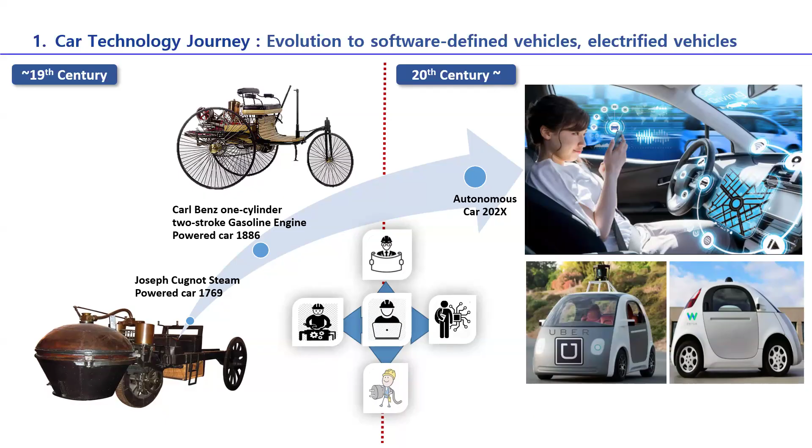So now I'll briefly cover how technology changes. Till the 19th century, we had a powertrain system, which is mainly related to the energy of the vehicle, that is the engine. Earlier there were steam engines and gasoline engines, but now there is a revolution, and all powertrain systems have been electronified.

From the 20th century onwards, there are engine management systems for petrol, gasoline, diesel, and biofuel. After that, there's an era of hybrid engines, then comes the fuel cell, which is mainly used in heavy vehicles, and there are electrical vehicles. So there's a big transition in the powertrain system as well.

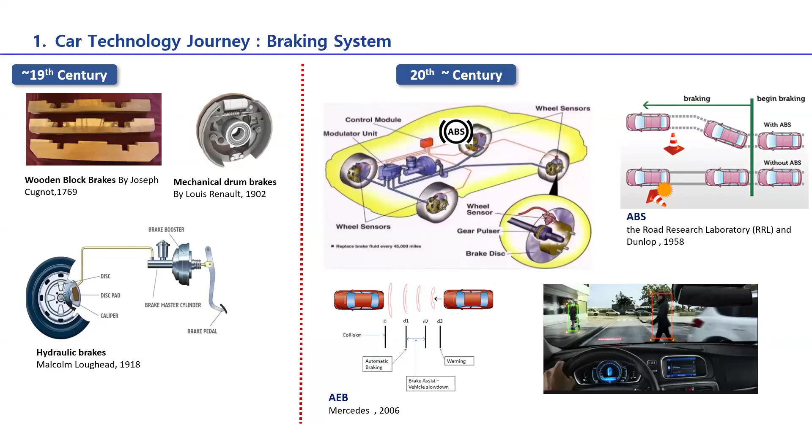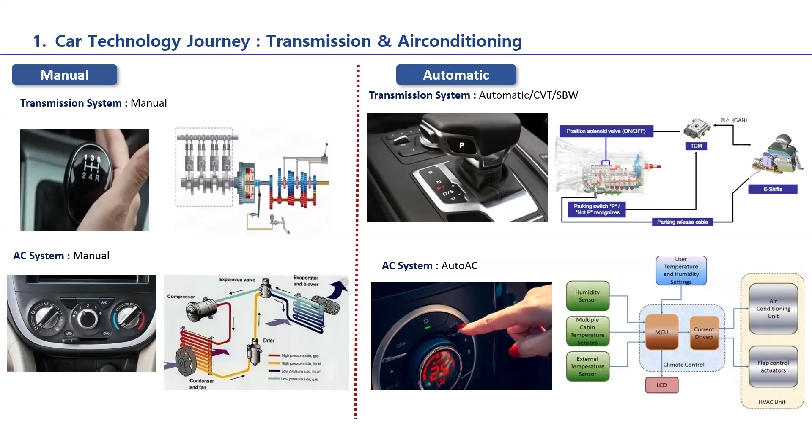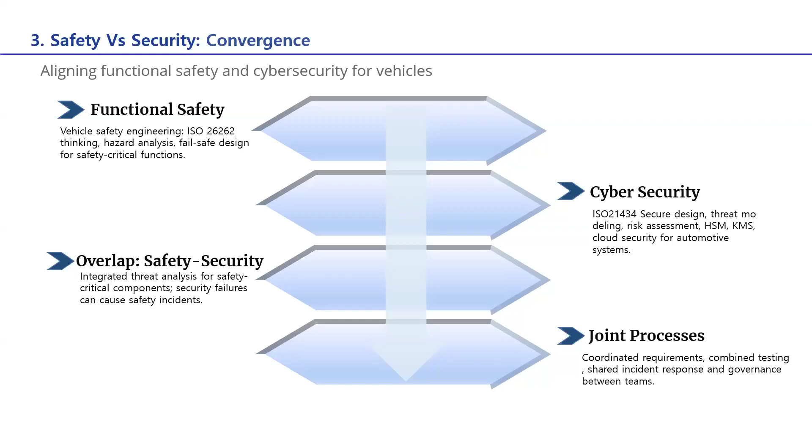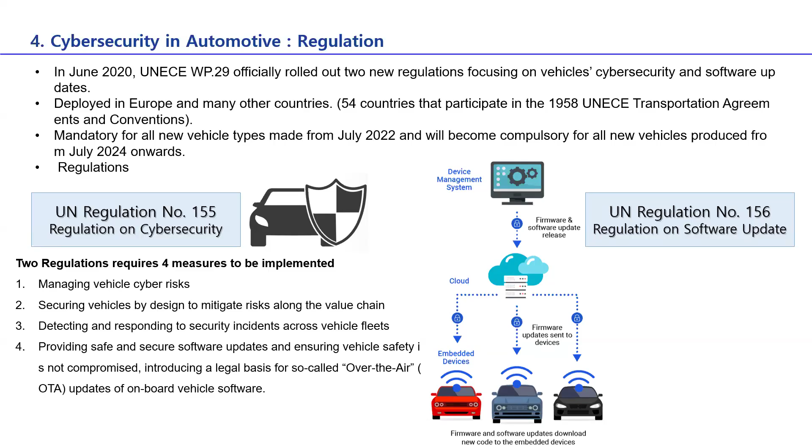Next slide. Okay, so again, this slide covers the regulations and what standards are there.

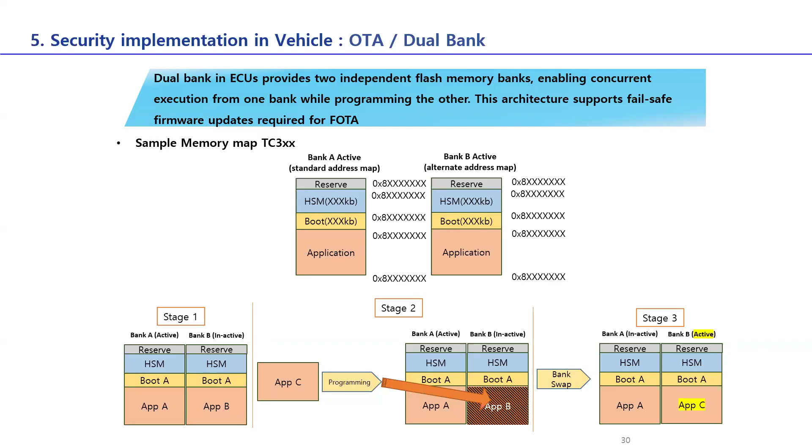So I hope you are able to understand some brief about the security mechanism. These are the kinds of mechanisms being implemented inside the controllers. With this, I think if there is any query, you can let me know.

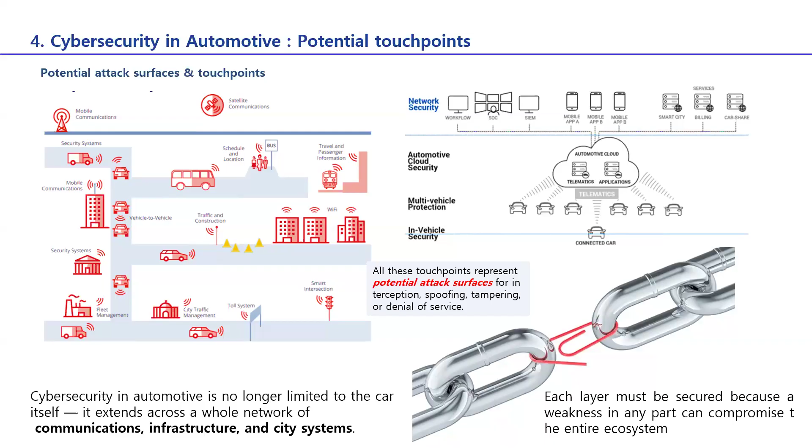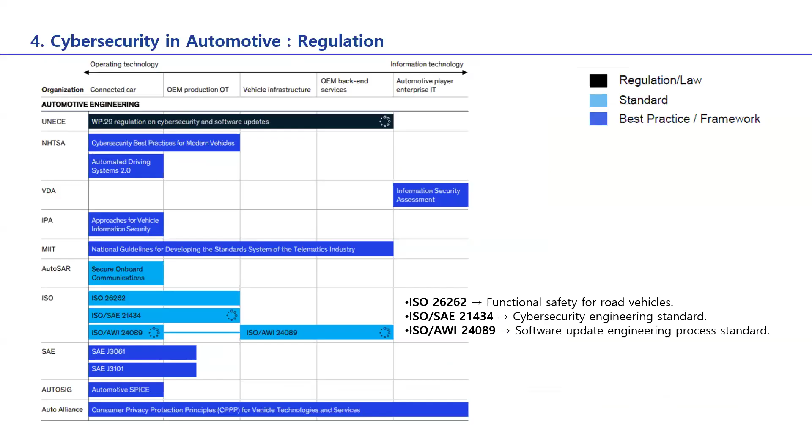Basically, for example if I'm talking about regulation - at the system level, software level, every level, there are different regulations. So like ISO 26262, for example, if I'm saying I'm compliant to ISO 26262, that means I'm complying, then for that ISO 26262 level regulation, I mean approval, I have to take from the authority.

There is a TUV, like one authority, some agency, and there is this ECE R155. There is a third party agency through which the approval has to be taken. For example, at component level also approval has to be taken, then at the vehicle level also. In India, cybersecurity regulation will be introduced in 2028, so in that case there is ARAI, or different agencies which will be capable of giving the certification approval.

Okay, you understand? Okay sir, thank you.

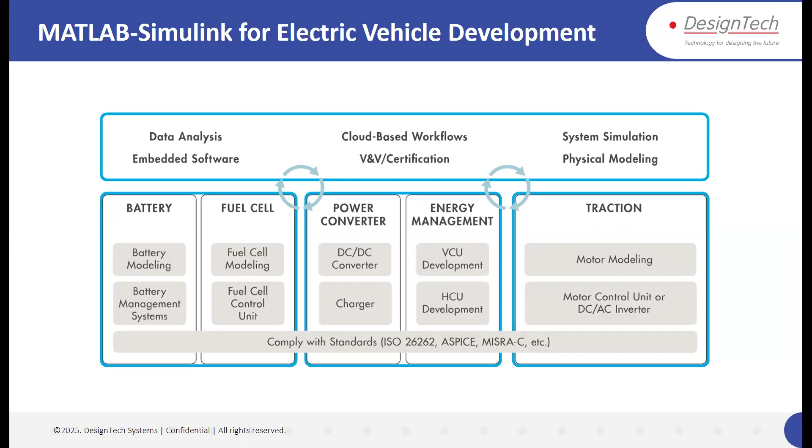Okay, let's move. If we talk about the electric vehicle's major components, let me make one flow chart for you so it will be easy to understand how the current and power is going to supply, and how these components are going to contribute to the heat. First of all, as we know, we get electricity from the grid, generally AC, and it is developed from renewable or non-renewable resources. Then we have AC, and as we know, we have a battery which is going to store the DC supply because we cannot store AC.

So we need one converter, known as the AC to DC converter, also known as rectifier, or with some auxiliary components, it will become your charger. It is going to convert your AC, which may be single phase or three phase, depending upon which kind of charger we have. There are different classifications of chargers, like onboard charger, which is on the vehicle itself.

Okay, there is onboard charger, and there are also other classifications like level 1, level 2, level 3, single phase, three phase. There are so many other classifications of chargers also. So it's going to contribute - if we are going to use level 1 and level 2 charger, it is going to connect with the onboard charger itself.

Level 3 is the only one which is directly going to convert your AC into DC, and then it will directly feed the battery with the help of BMS. But level 1 and level 2 chargers are going to connect with the onboard charger. Generally, an onboard charger will be around 7 kilowatt, so it's going to contribute to the heat while charging the battery as well.

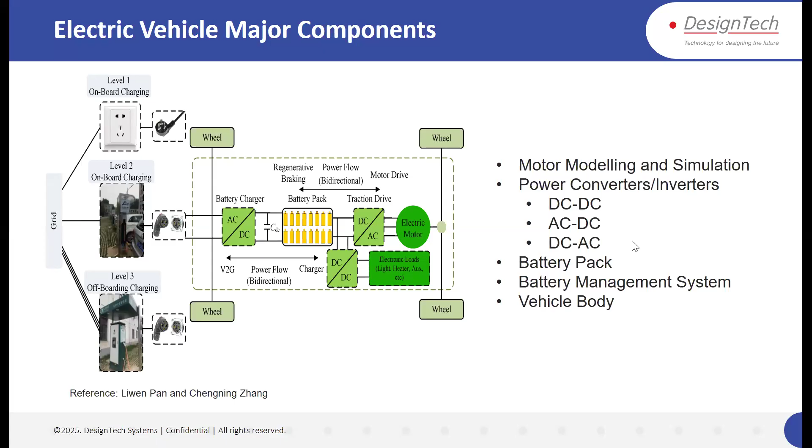So let's move ahead. First of all, we have to understand the working of lithium-ion batteries. The major components are the cathode, anode, electrolyte, and separator. The separator is the most important one in lithium-ion batteries, because it separates the cathode and anode.

If anything happens to this separator, it will contribute to faster movement of ions and electrons through the electrolyte, which will make the cathode and anode short circuit. This will increase the current, which increases the copper losses, or heat losses, and then raise the temperature of the battery, eventually leading to thermal runaway.

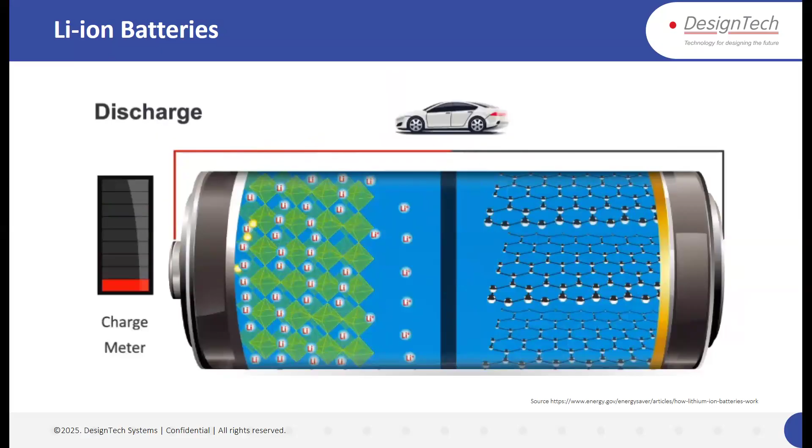The reverse happens during discharging: lithium ions flow from the anode to cathode, and electrons flow through the load. So this is the working. If anything happens to this separator, it is going to damage the battery itself.

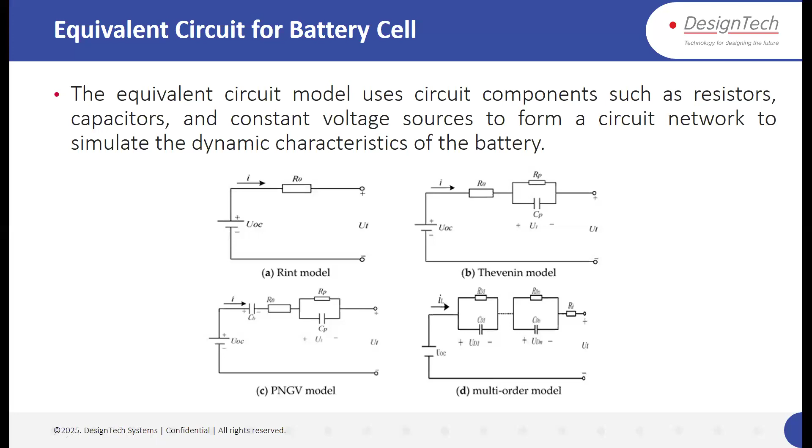Now, the Thevenin model is the most common one, but if you look into others, except the Rint model, which is a very basic model, Thevenin or PNGV or multi-order, these are almost going to be common. Even if we have multi-order, the complexity of this model is going to increase. So generally, industry prefers the Thevenin equivalent model, or in some cases, high order Thevenin model also.

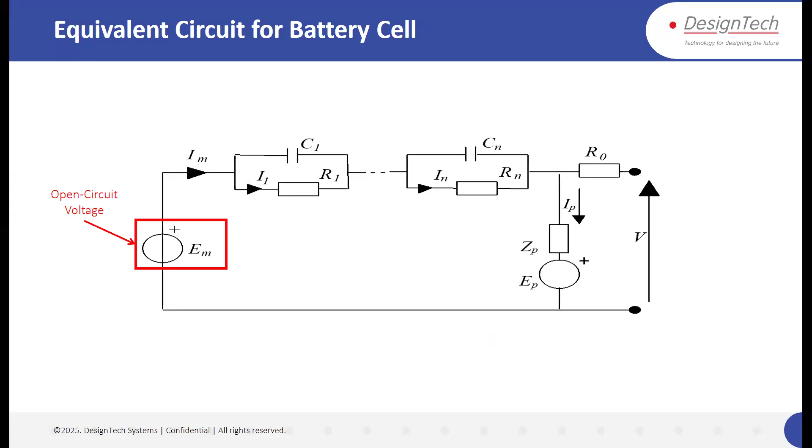So if you see this equivalent circuit for battery cells, most things are common. Here you will find the open circuit voltage, which is going to depend upon SOC and temperature also. And then internal resistance will be over there. Internal resistance or terminal resistance will always be present. If we have not connected any load from the battery, these two are always present.

So terminal resistance will cause the battery to self-discharge after some time. Thereafter, we have this transient behavior or dynamic behavior also. This is known as polarization resistance or polarization capacitance, which is going to be present if we connect the load, and then current is going to be extracted from the battery, then the battery tries to mitigate and fight against that current which is going to be drawn. So that is known as transient dynamics here, and that depends on all these resistances which are going to contribute to the heat, whether it's terminal resistance or polarization resistance R1 or Rn, it is going to contribute to the temperature.

So thereafter, in some cells there are some parasitic losses, but in lithium ion batteries that is not present, or very minimal, so we are not going to take it into account. So if you see all these resistances, polarization or terminal resistance, are somehow a function of SOC, temperature, current and voltage.

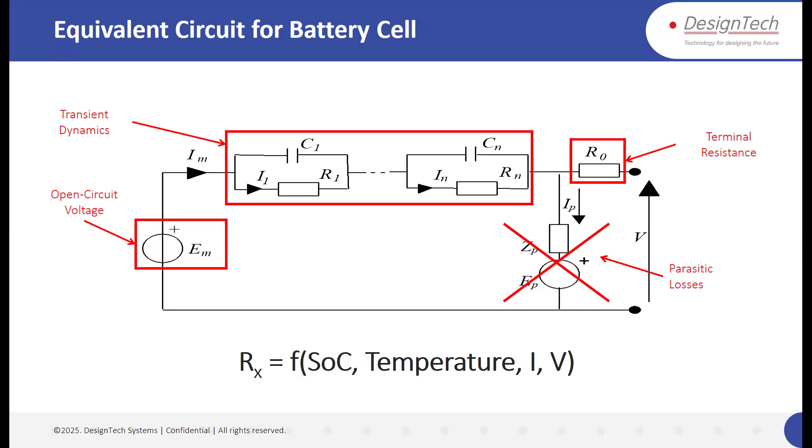You cannot tell, at a definite state of charge, how much voltage will be there. Or you can say, in another way, that by looking at the terminal voltage, you cannot tell how much percentage the battery is charged. We need proper SOC estimation. SOC also depends upon this open circuit voltage, the temperature, and many more things. So for that also we need to do the modeling.

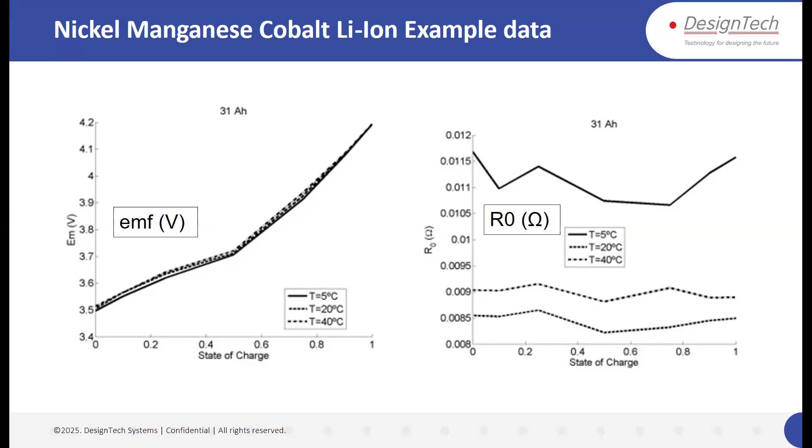If we operate the battery at low temperature, it will also lead to an issue called lithium plating. That will also cause problems, and in the long run it is going to degrade the capacity of the battery, and may also lead to thermal runaway. So both of those are not suitable for the battery. That's why we have to manage the battery in the 15 to 35 degrees Celsius range, which is the desired operating range for any kind of battery.

So here comes the role of SOC estimation. Why do we need to accurately estimate the SOC? Because if we have the accurate SOC, we can set the limits of the BMS. Suppose generally what we do, if we have any battery, we set the lower limit to 15%. You have observed in your mobile also that at 15%, or 20%, it starts asking to put the battery into charging mode.

And at the higher level, we set the limit to 95%. If you observe, if you are charging your mobile battery, after 95% suddenly it will show you 100%, in order to save the battery. So we set this limit, 15% lower limit and 95% upper limit, and it may vary depending upon the manufacturer. So what will happen, if SOC is going to be more than 95%, it will give a signal to the BMS, and the BMS will isolate the charger. If it is 15%, then the BMS will isolate the load in that condition.

So to know the percentage of battery charge, we need SOC properly, and it will give you information about driving range. It depends, it's relative to the battery, and there will be proper communication between the BMS and battery. So there will be an algorithm for calculating the driving range depending upon how much power is going to be consumed. We will see, if we have turned on the AC, then how much power is required to operate the compressor, through the graph.

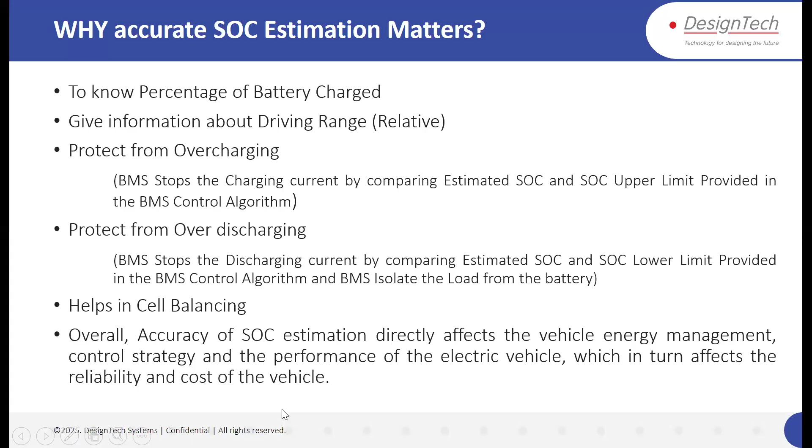Moving ahead, there are different types of estimators. We don't need to worry about the equations behind those estimations. Like Coulomb counting: the final SOC is the initial SOC minus the integration of the current coming in, divided by the total capacity of the battery. We don't need that information once we have these blocks in the Simulink environment.

This comes in the Simscape Battery toolbox. Here we have the basic SOC Coulomb counting method, where we have current and initial SOC only as input, and then we get the final SOC. So the accuracy will be less in this Coulomb counting SOC estimation.

Then we have variable capacity, and SOC estimation using the Kalman filter as well. Here we have the pack current, cell voltage, cell temperature, and initial SOC as inputs. We also have the adaptive Kalman filter.

So as the level of these filters or estimators increases, the accuracy also increases. Now industries are using either Coulomb counting, if it's for a two-wheeler or three-wheeler, or the Kalman filter mostly if it's for a high-speed three-wheeler, two-wheeler, or even four-wheeler. So in the MATLAB Academy, there is a course

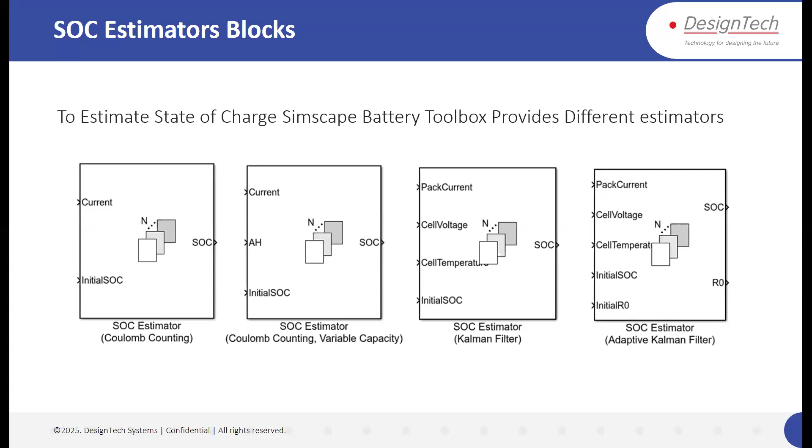named Battery Pack Modeling, and you can go there and learn these things in that course as well. Now moving ahead to battery pack modeling.

First of all, we have already understood the cell. Now there are different types of cells based on form factor: we have pouch cells, prismatic cells, and cylindrical cells, the most common one. These cylindrical cells, or any shape, can be connected in parallel.

Then we get the parallel assembly. And if we connect these parallel assemblies in series, it becomes a module. If we connect multiple modules together, it becomes a module assembly. And if we have different module assemblies combined, it becomes a battery pack.

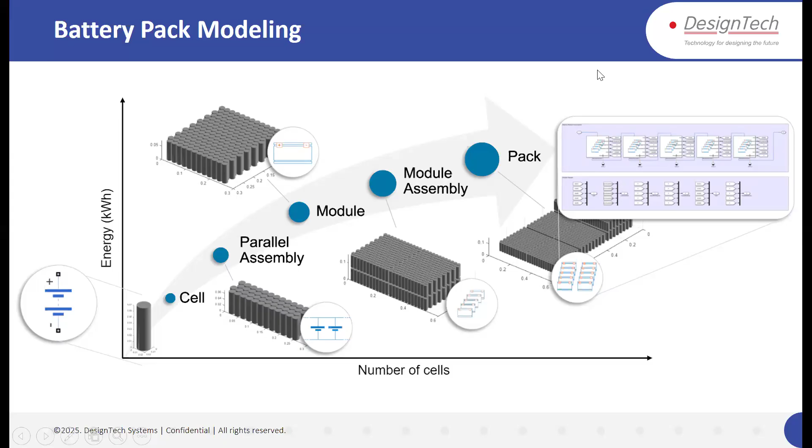You can do all these things either through MATLAB coding, or there is a Battery Builder app. There you can easily integrate the different components - these images are made in the Battery Builder app, so you don't need to worry about building from very basic things. So using Simulink, Simscape, and the Battery Builder app, you can make the battery pack model here. And then we have the battery pack modeling.

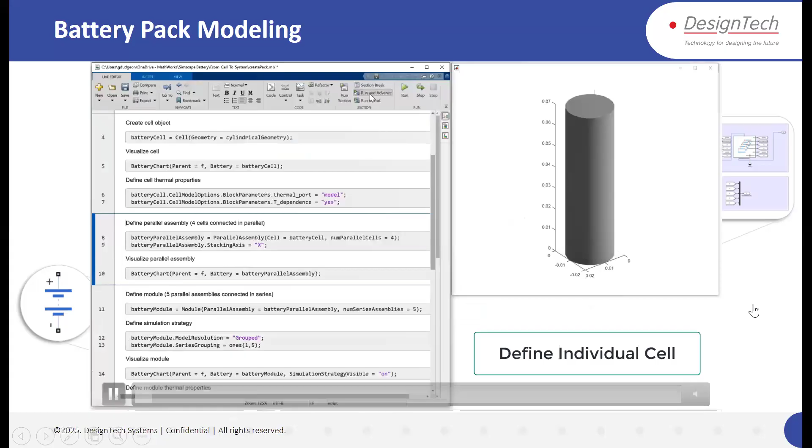Here you can define the individual cell, you can define the parallel assembly. It's being shown through the coding, but without coding also you can do that. Then you can define the module. Here we have taken 4 cells in parallel, so in this way you can do that.

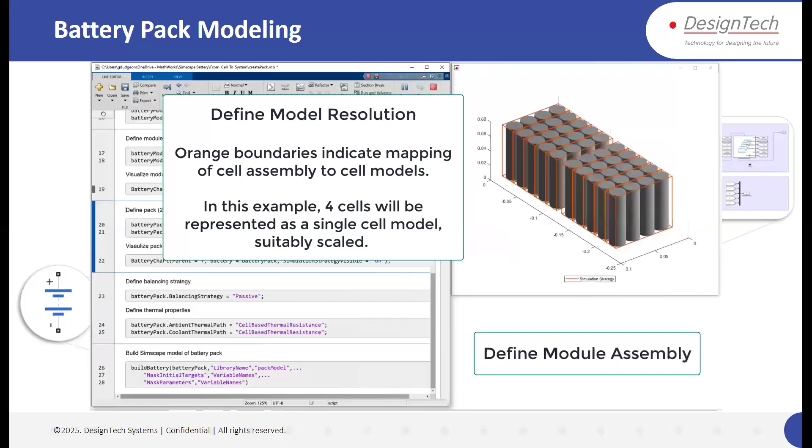Thereafter, we have connected these modules into series. Then it's becoming the module assembly, and then it's becoming the battery pack. So from the cells to module to the battery pack, it is going to be designed. Here you can generate these things, and thereafter you can add the battery pack and electrical

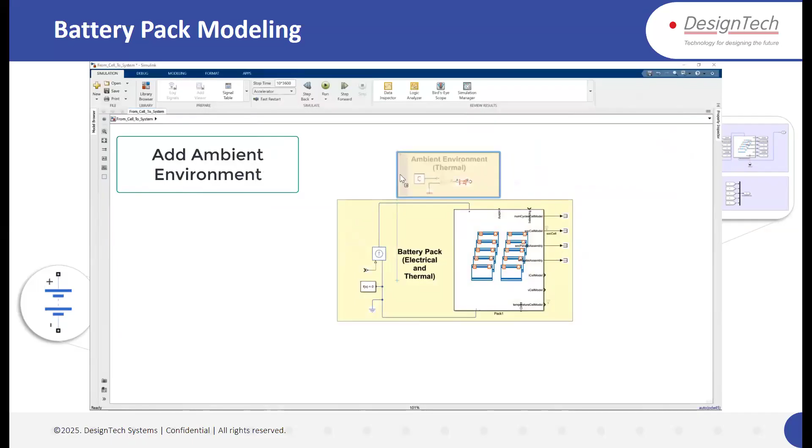load across it, and then you can add the ambient environment into the simulation area, because we cannot test the real battery in different environments, so we can do all these things in the simulation.

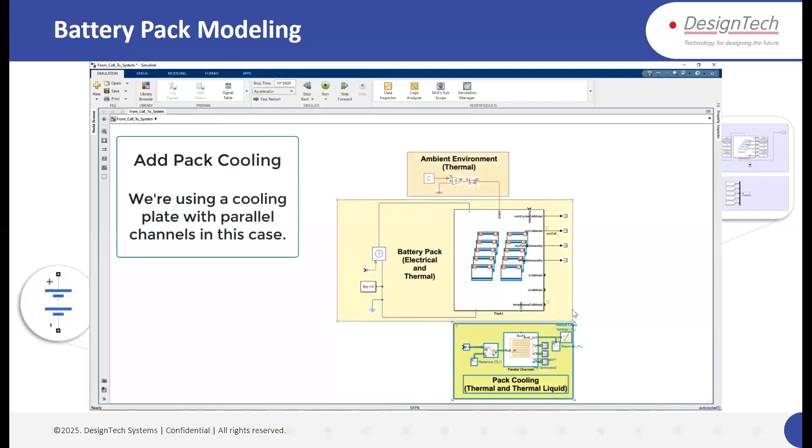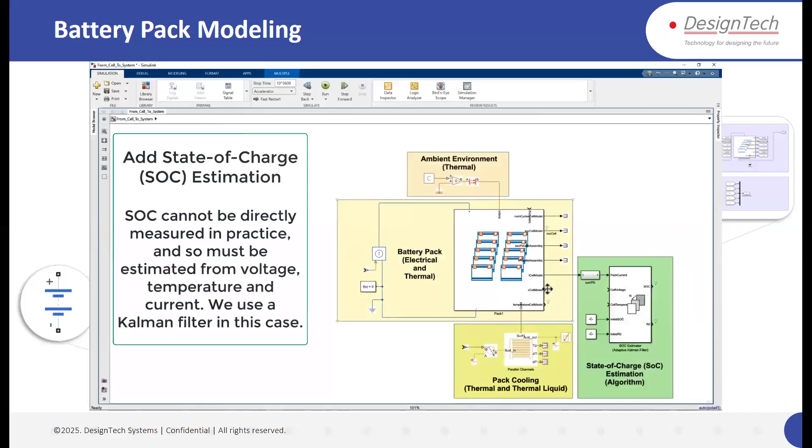Thereafter you can add the battery pack cooling things, liquid cooling or natural cooling, and there are different types of SOC estimation algorithms that you can use. So here adaptive Kalman filter has been used in this demonstration.

Then state of health estimation, that is also important because it's going to impact the overall capacity of the battery. So you can add these SOH estimator also into the battery pack modeling.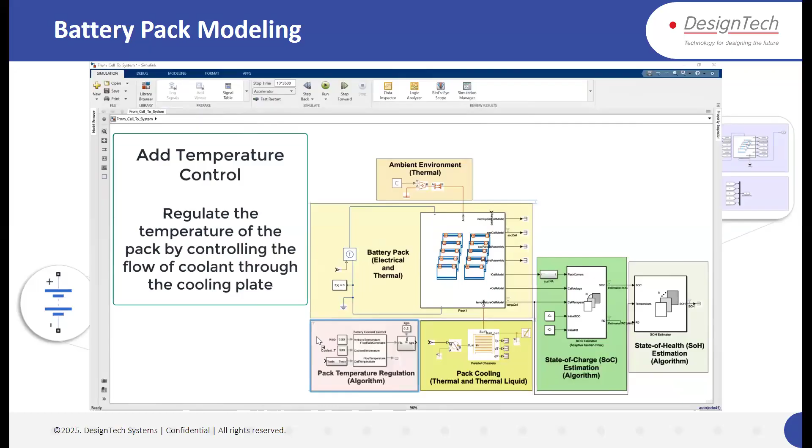You can add the temperature control also in this model. So you can do everything into one environment through physical modeling using the Simscape toolboxes. Here we are using the cell balancing algorithms. These all are important in order to properly simulate the behavior of the battery under different conditions.

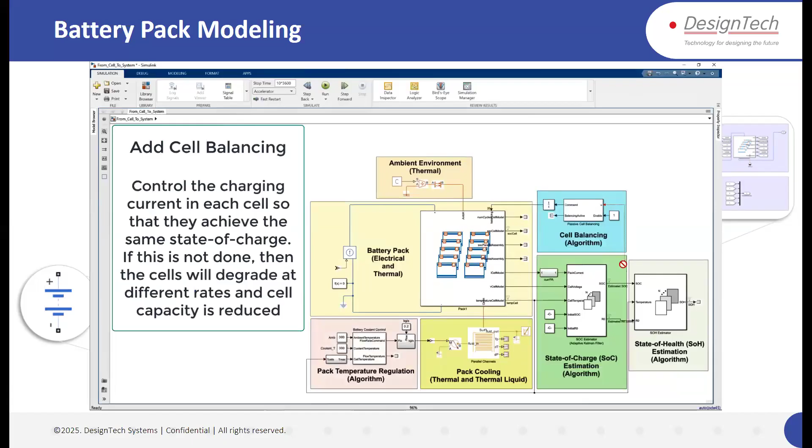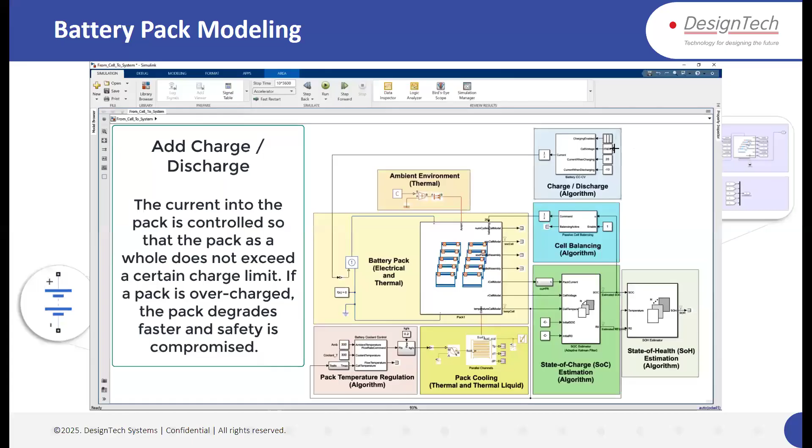Then you can use the charge or discharge algorithm. So we have different charge and discharge algorithms like CCCV and CPCV, and pulse charging is also coming, which is being used. I will show you one example through the CCCV as well coming up.

Industries are using these things for rapid prototyping. So these things can be created. From the cell to system, you can create all these into the Simscape battery environment.

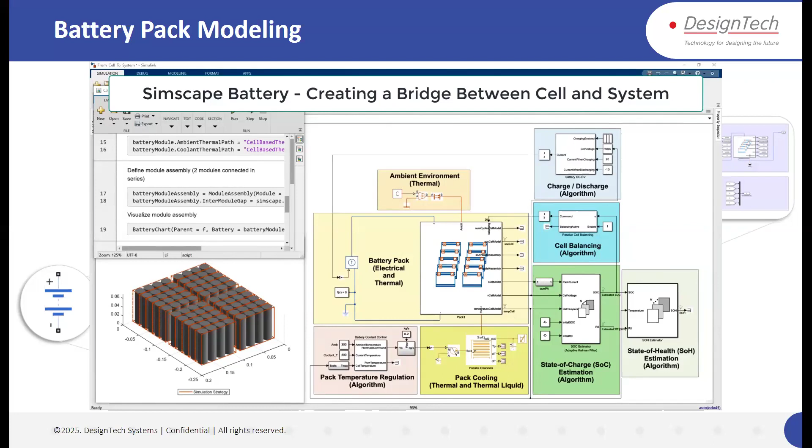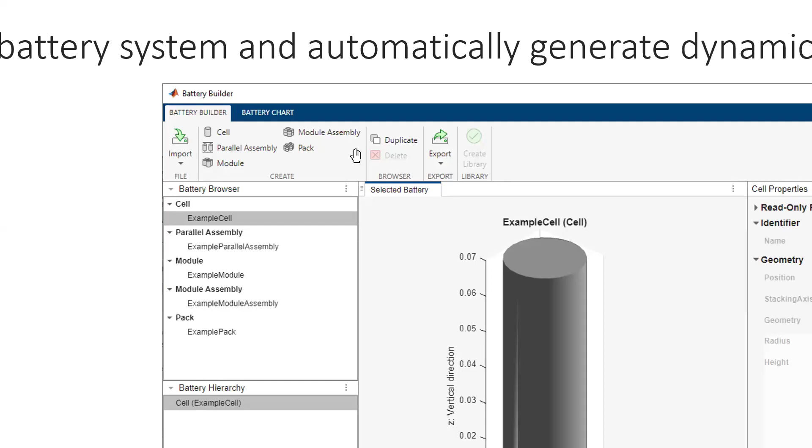Thereafter, you can also define the battery system and automatically generate dynamic models. This is your battery builder app, where you can see, if you observe here, this is the battery builder app. You can either import any model or example, or you can define your cell here.

So cell geometry can be decided here, whether you want it as cylindrical, prismatic, or pouch. That can be decided over here, and then radius, height, everything matters here, because there are three types of heat transfer: radiation, conduction, and convection. So these height, weight, and radius, all things matter in that.

So you can define each and everything, and thereafter you can define the cell parameters and many more things, so that from the cell to module assembly, and then you can design the battery pack, everything here with very interactive, low coding or no coding in MATLAB's Simscape toolbox.

And under the Simscape battery we have this battery builder app. So if you would like to know how to design the battery pack, there is one battery pack modeling course on MATLAB Academy. You can go, and this is free of cost. I think you can go and learn this on-ramp course through MATLAB Academy. I'll provide this sheet to all of you, so you can go through these slides and this link as well.

Then BMS. BMS is like a brain of the battery. I have a question for you all: kindly note it down, why do we need BMS with lithium-ion battery, not with other kinds of battery like lead acid? So this is my question.

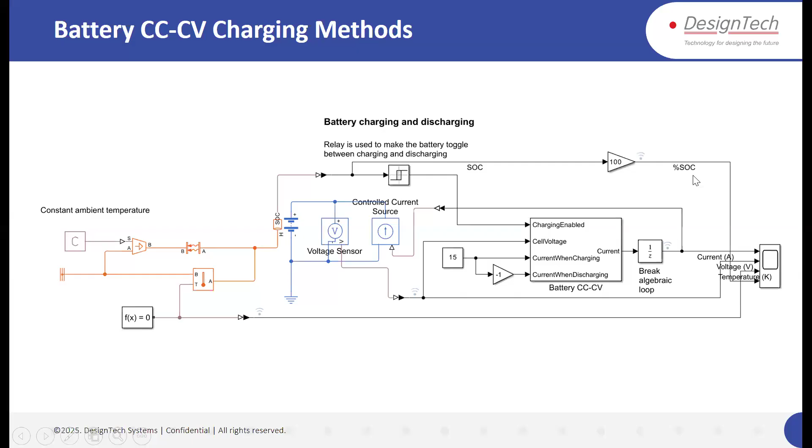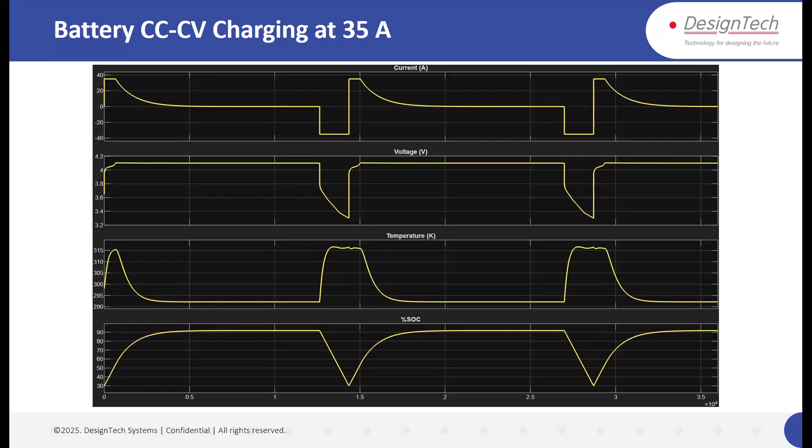If anything happens because of mechanical abuse, electrical abuse, or thermal abuse, these batteries can go under thermal runaway. So what will happen in mechanical abuse? If penetration or crush happens on the battery, it will deform the separator. As I've told you, the separator is the main organ, you can say, of the battery. If anything happens to the separator, it will create an internal short circuit.

So if mechanical abuse happens, it will create internal short circuit here, and then it leads to electrical abuse. Internal short circuit means cathode and anode will behave like a short circuit, and electrons will move very fast from cathode to anode and vice versa through the electrolyte, not through the external circuit. This will be very fast, and anode and cathode both will not be able to handle that much current. Because of that it will create heat - I square R - and hence it leads to thermal abuse.

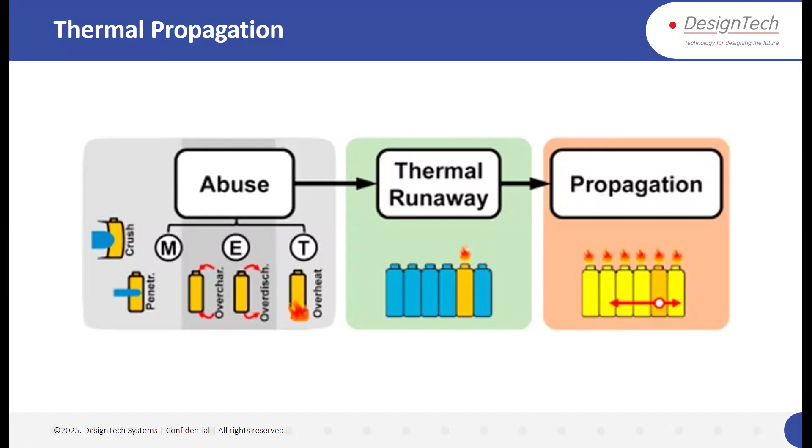So for that purpose, we have the refrigeration cycle. There are 4 processes in this refrigeration cycle. The first one is known as compression. This is the first step, and it is going to increase the pressure and temperature of the working gas.

The next step is condensation, through the condenser. So cycle point 2 will go here, and condensation is one of the key heat exchange steps. The hot gases of the refrigerant fluid condense into a liquid form, which causes the latent heat of vaporization to flow into the environment.

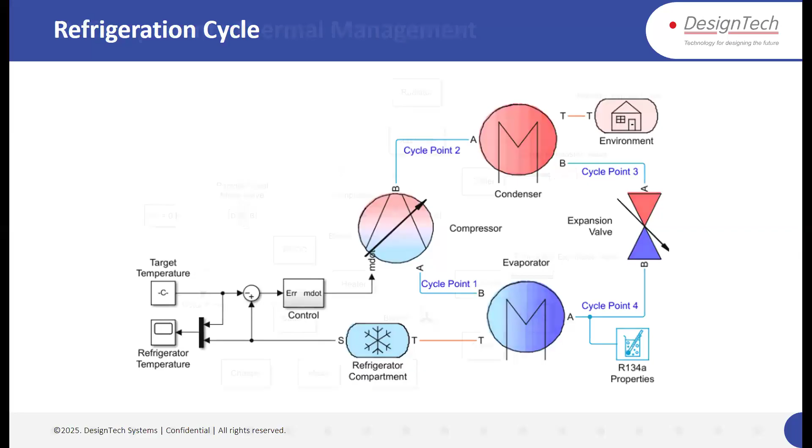Thereafter, this expansion valve is there, and it will expand, and then it will pass through the evaporator, which will cool down that liquid. This process will happen. So overall this is going to happen, and how we are going to model this into MATLAB is shown over there.

Now the heat from all these components is collected and expelled to the environment using the radiator. If radiator is not enough, then we have the chiller, and then it will do the other part.

The second subsystem is in the car cabin. We always need, sometimes, cooling into the cabin, and sometimes we need to heat up the cabin. So for that we have this PTC heater, and we have evaporator which works like an AC.

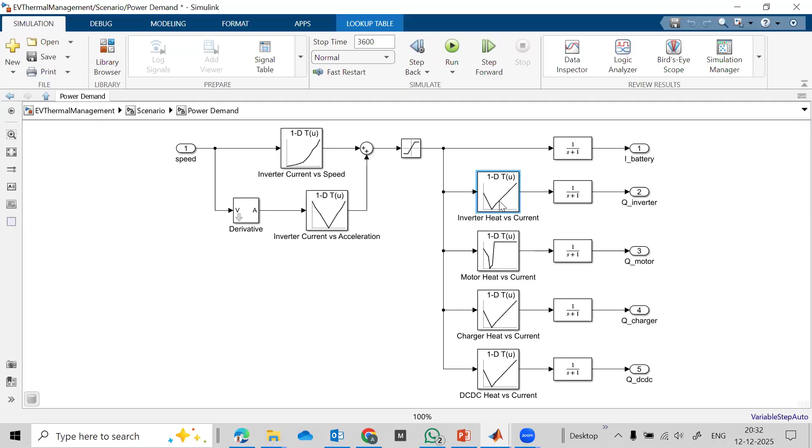This relation is represented between the heat and the current which flows through the inverter, and how much heat has been caused because of that. So inverter heat, motor heat, charger heat versus current, and DCDC heat versus current has been given. This is some data which we have given. Don't worry, I'll share this model to all of you so you can explore about it.

Thereafter, we have the control subsystem over there, which controls all the controllers for the pumps, for the compressor, for the fan, blower. So for everything, it does this. This involves in the thermal management. Cabin air control, fan control, coolant loop control, and compressor control has been done through there.

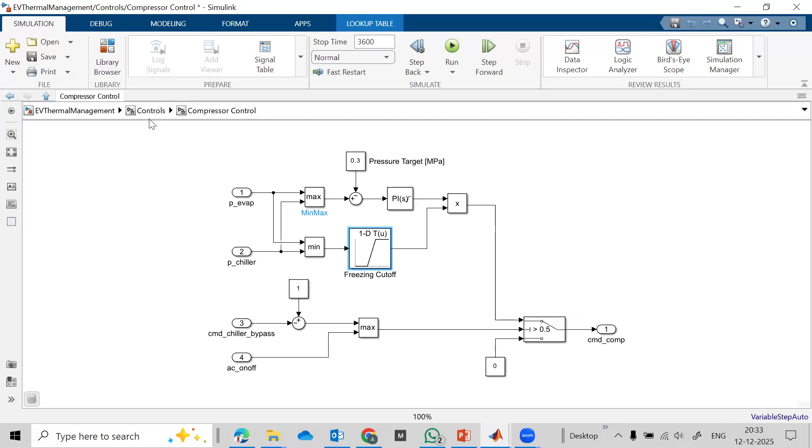And there is another subsystem inside every control, so you can explore these things. So freezing cutoff has been done, minima and maxima has been set. What minimum temperature we need, what maximum temperature we need, everything can be commanded over there.

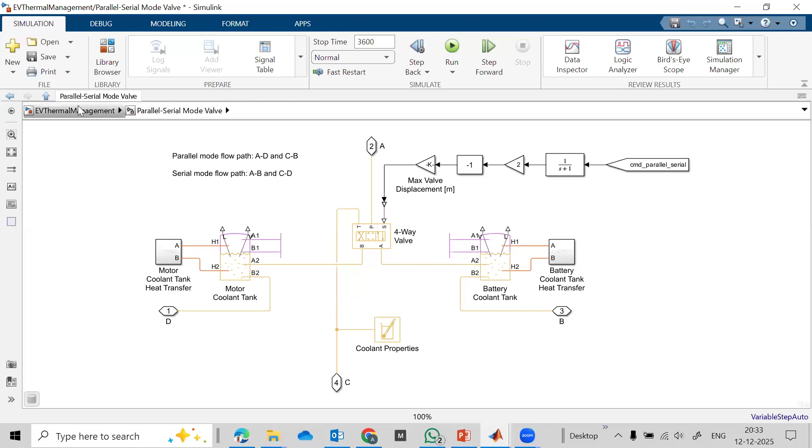As I have told you, serial and parallel mode. Here, if parallel mode is happening, it's A to D and C to B. So A and D connect together, and C and B connect together, then it will be like a parallel mode, which is used in the cooling environment. And if the battery needs to cool down, we need parallel mode. If the battery needs heat, then we use the serial mode, in which A and B will be connected with each other, and C and D will be connected with each other. So this is a valve, a four-way valve.

Thereafter, motor pump subsystem is here. The motor pump maximum speed is written in RPM, that is 1000 RPM, which is going to run the motor pump, and then fluid moves across it.

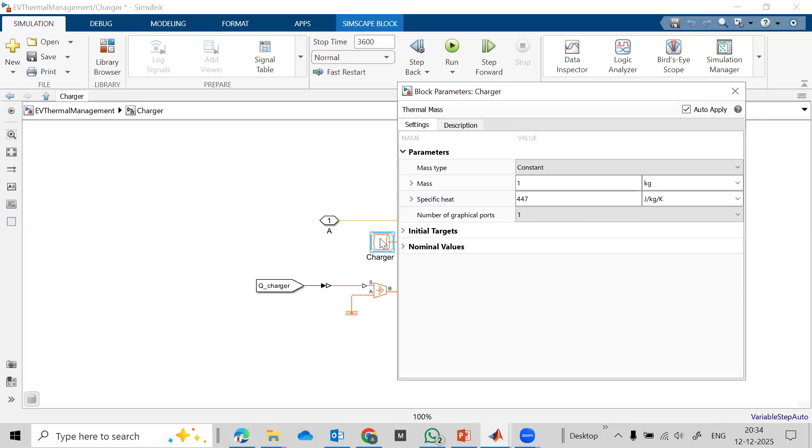Then we have the charger subsystem over here. The same thing, we have the coolant jacket, and rather than using a detailed charger model, we have given thermal mass of the charger, which is 1 kg, and specific heat is 447 joule per kg per Kelvin. If you have any model of the charger having thermal behavior also, you can replace this model with that one, and then you can also test. In that condition, you can find out the dynamic behavior of the things also.

Thereafter, we have the motor subsystem as well. Here also we have the coolant. Similar kind of modeling has been done in all this - inverter, motor, and charger also. So similar things has been used.

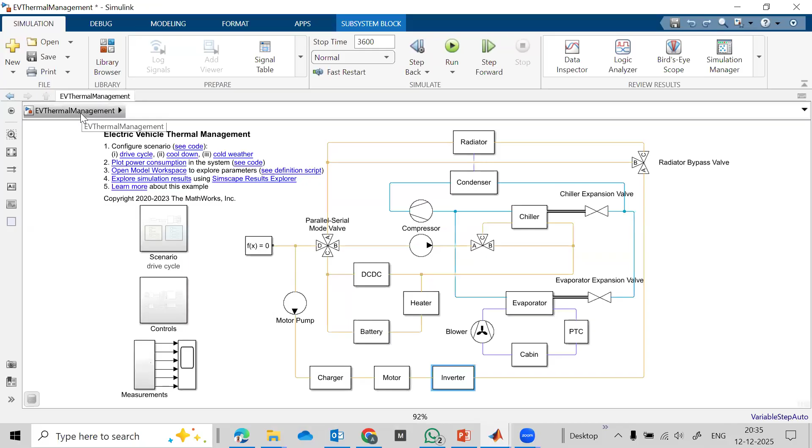Then we have this radiator subsystem. In the radiator, we have different types of environmental air, so it is going to switch in between that as well.

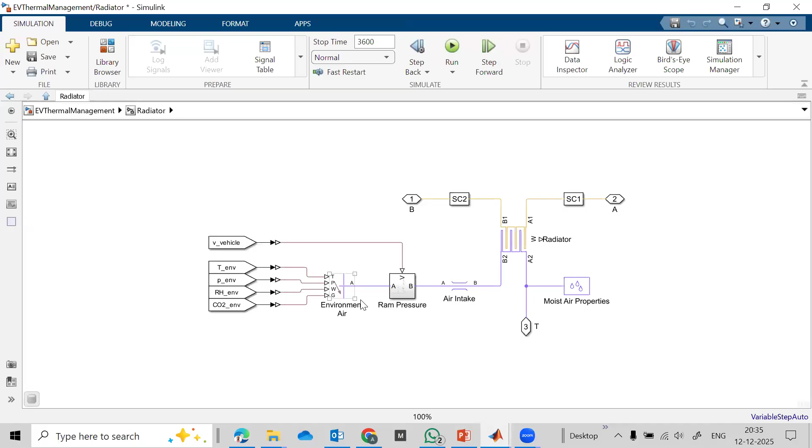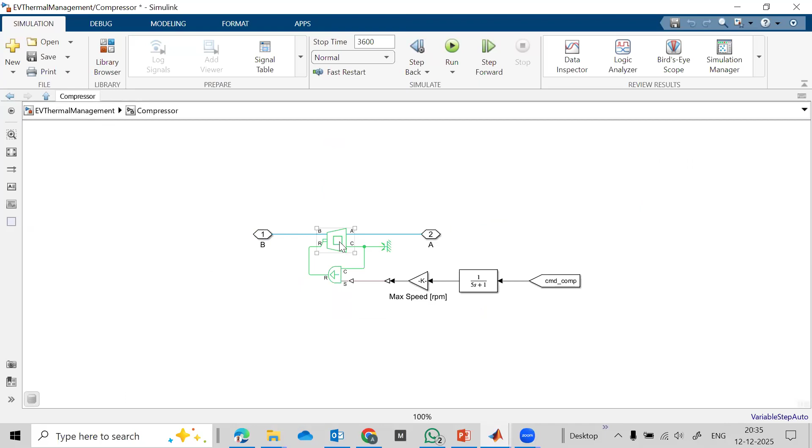Thereafter, we have the compressor. This is a positive displacement compressor we have used, and then we are going to give the command to the compressor to operate.

Likewise, we have different other subsystems, so it is going to be quite similar to each other. I will share all these examples with all of you, and then you can explore. Let me share the CC other methods also.

So this is the CCCV method. If you observe, I would like to tell you 15 ampere. So what is going to happen at 15 ampere? Let me run that model.

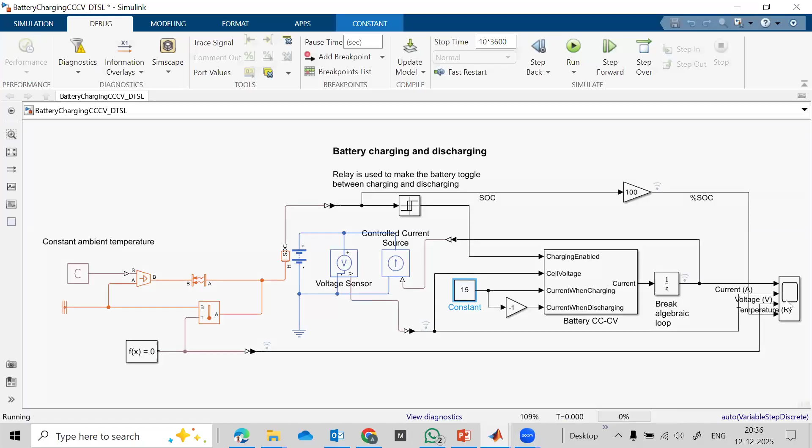If you observe here in the scope, let me go to data cursor. So this is the constant current phase. I'm going to bring this constant current phase when it is 15 ampere. So in this phase it is 15 ampere, and we are looking at the change in current from 0 to 15. Let me make the changes here.

So this is 2939 seconds. For this much time, it is going to be fast charging, and in another phase it is going to be slow charging. If you see the temperature rise, our focus is temperature right now, so the change in temperature is going to be 1.3869. That has changed. If you look into the SOC, it changes to 45.35. So in this way, you can explore more about any kind of system you are making.

Thereafter, if I'm going to move this to the CV phase, so it is going to be like this. This phase, this time, is going to be less, and you can see almost no change in the value.

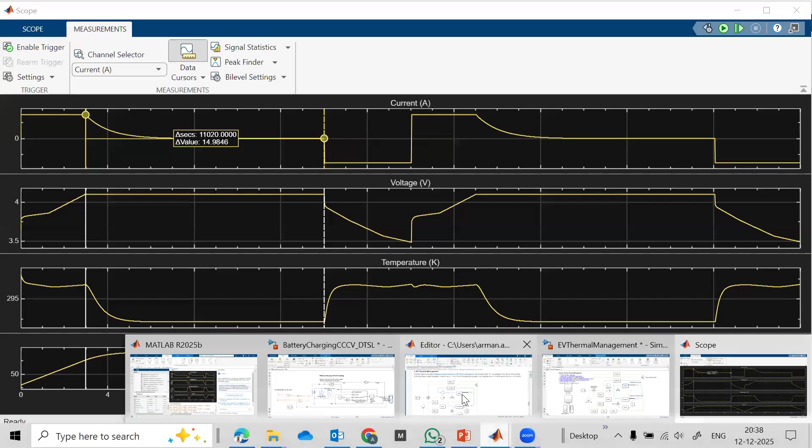If I'm going to change this amount of current - since it is a 27 Ah battery, I'm going to use 27 ampere over there. I'm going to run it for 10 hours. So this will get decreased as well here.

So you can see this constant current timing has decreased - almost 1200 seconds now. Earlier it was almost 2400 seconds where the fast charging was happening.

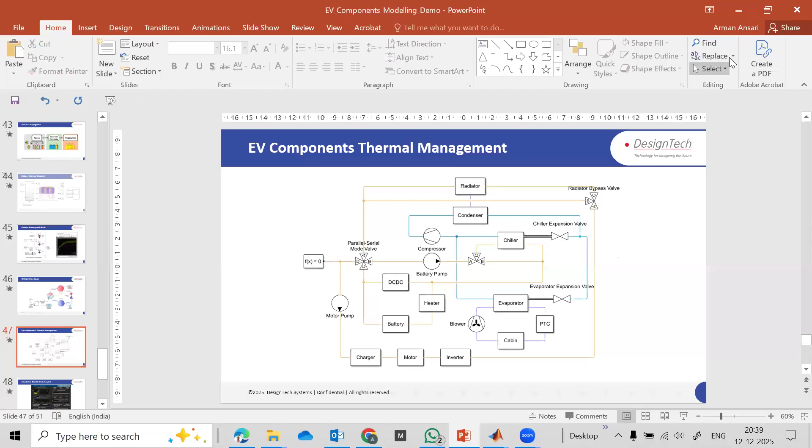Now let's move to the slide once again. I have to explain some more things about the EV component thermal management. So if we are going to run that into the different environment.

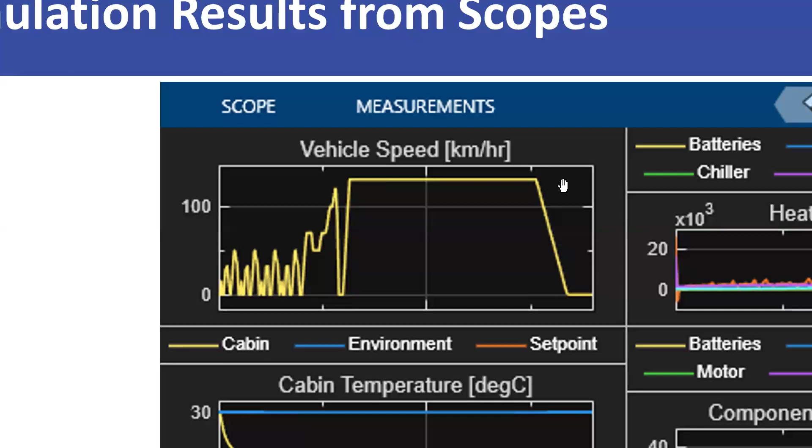Here you can observe this is in the drive condition, drive cycle condition. The vehicle speed was constant in this phase, and this is the NEDC drive cycle. So cabin temperature is going to rise - cabin temperature is 30 degrees Celsius initially, which comes down around 21 degrees Celsius, sometimes going up and down. We have set the limit at 21, which I showed you. But the environmental condition is 30 degrees Celsius and the set point is 21 for the cabin.

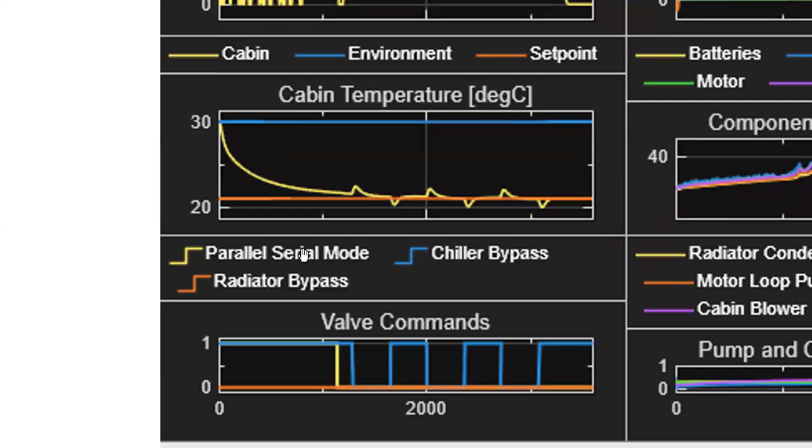Thereafter we have the parallel serial mode, chiller bypass mode, and radiator bypass is going to happen in this phase.

Then if you observe this - because I didn't run that model, as it will take time, I have just taken the screenshot after running it and I'm showing it to you so that it will not take more of your time. So if you observe the heat flow rates here, just a minute, in the battery...

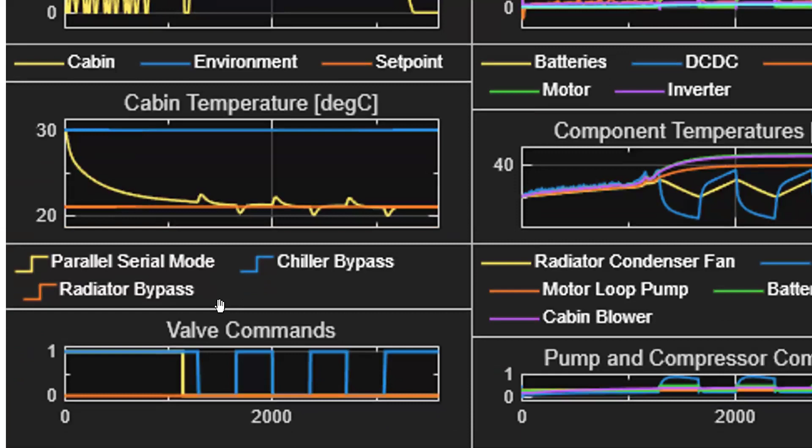You can see the condenser is going to take more heat flow rate, so more heat will flow through the condenser. The scope shows the vehicle speed, heat dissipation, cabin temperature, component temperature, and everything. The coolant tube is in serial condition, serial mode - at that time it is going to have the chiller bypass.

Thereafter, this pump and compressor component temperature has been shown. There is the radiator condenser fan when it is getting on, when the compressor is getting on, pump is getting on. That has been shown over there. This was for 3600 seconds.

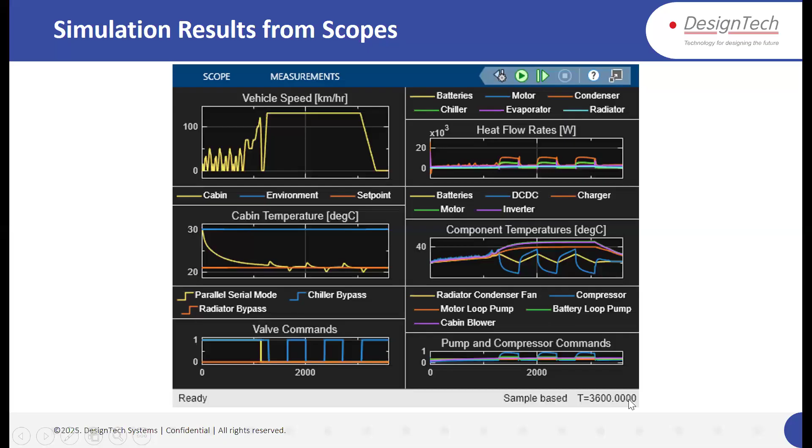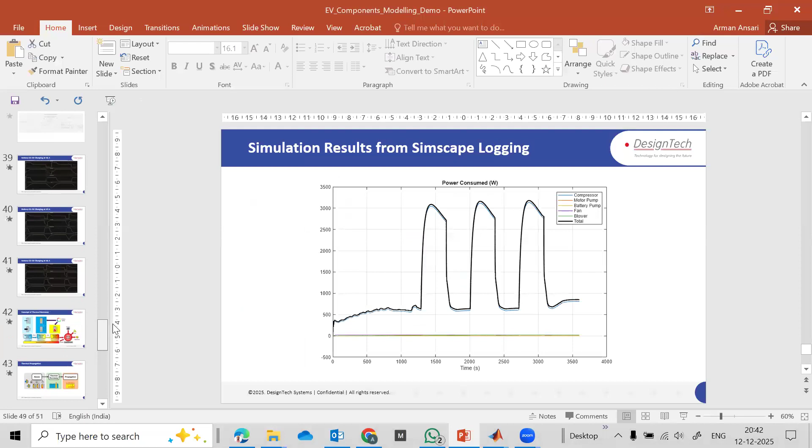I would like to show you one video demo also that we use in the industry to make the battery pack. Let me share that screen and play this video.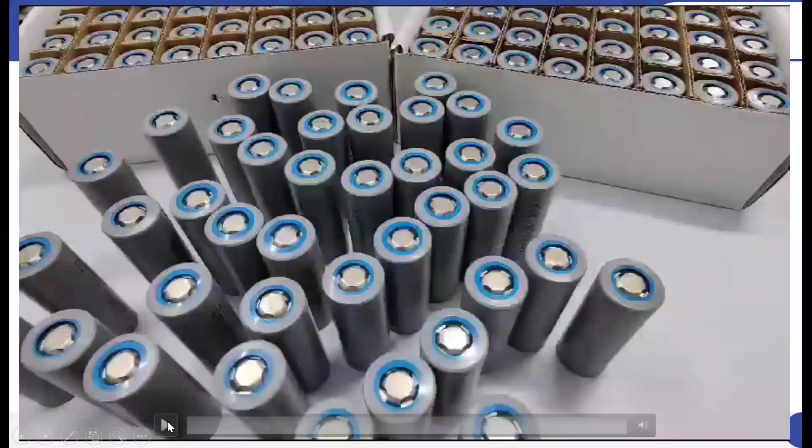So here you can see we have different types of lithium-ion cell batteries, and here you can see the cell data.

So here it is going to be 3.7 volt, and our maximum 4.2 volt is going to be passed through that. Later we will arrange them into series and parallel.

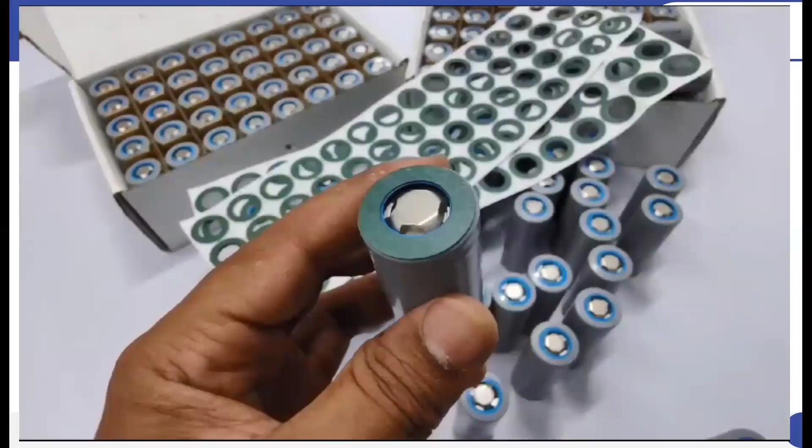So it will be connected in this way, and then the battery pack will be designed. We will arrange them into this way. We are going to create two modules in this video, so for two modules we need four types of such layers, one for upper and one for lower.

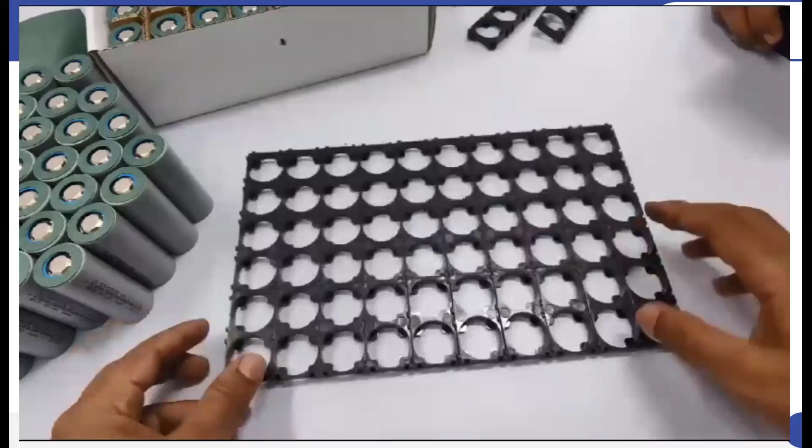Here we are going to arrange the cells into series and parallel. The flat portion of the cell is the negative terminal, and the cut one is the positive terminal. So that we are arranging into the series, because in series we have to connect the batteries into a plus and minus way. So this layer is going to be in series with each other.

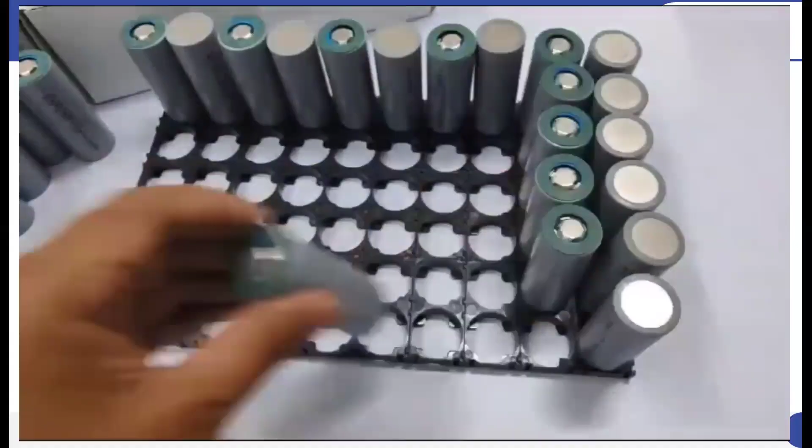Similarly, we have to do the other parts, and the similar anode or cathode is going to be arranged. So this row or column is going to be in parallel, because a similar kind of plate, anode or cathode plate, is there that we have arranged.

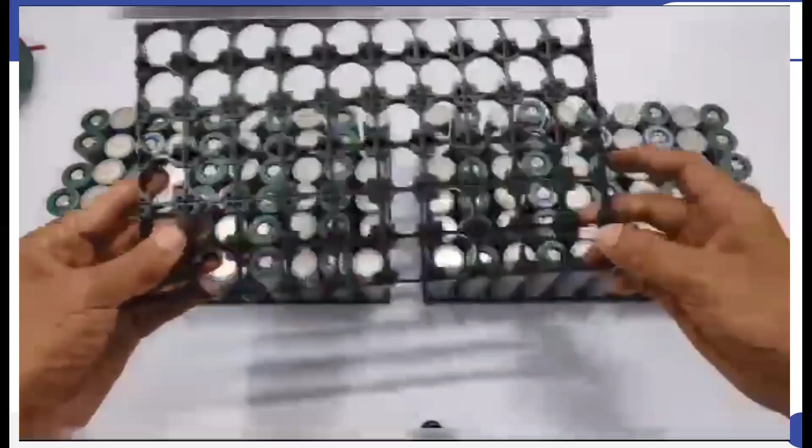In a similar way, we have created another module, and then we are going to put another cell spacer in between them. Now you can see this is cylindrical, so they have proper spacing in between them. That's why most of the industries are using this one, except Tesla, which has a dedicated battery thermal management system for their battery. They are using prismatic cells also, and this is known as the sheet, metal sheet, made of nickel.

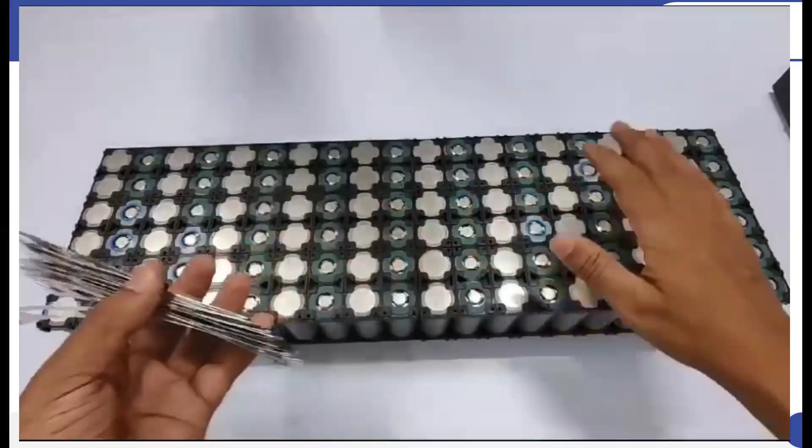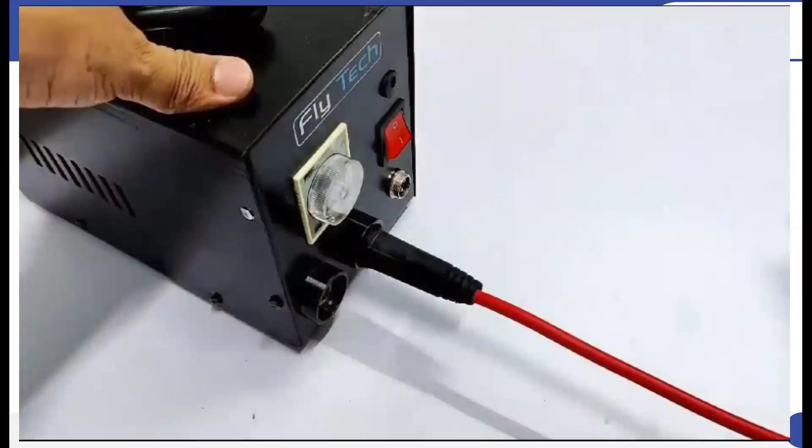This one is your spot welder machine, and then this is the foot control machine. We are going to apply foot pressure over that in order to operate the spot welding. Here you can see we are going to use this strip, and we are applying the pressure over that for the spot welding.

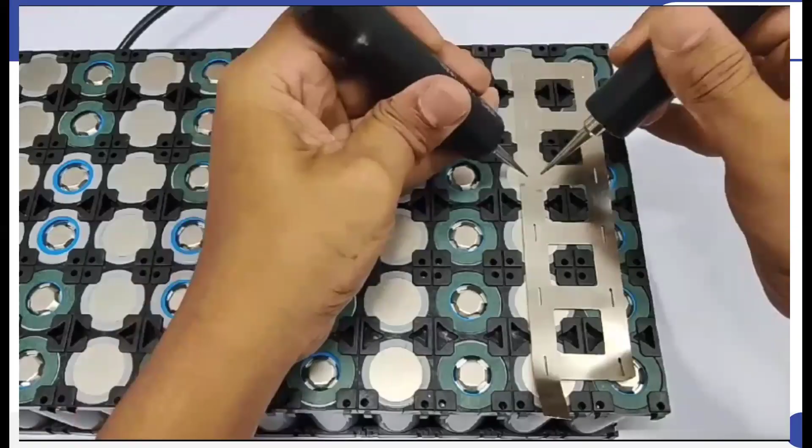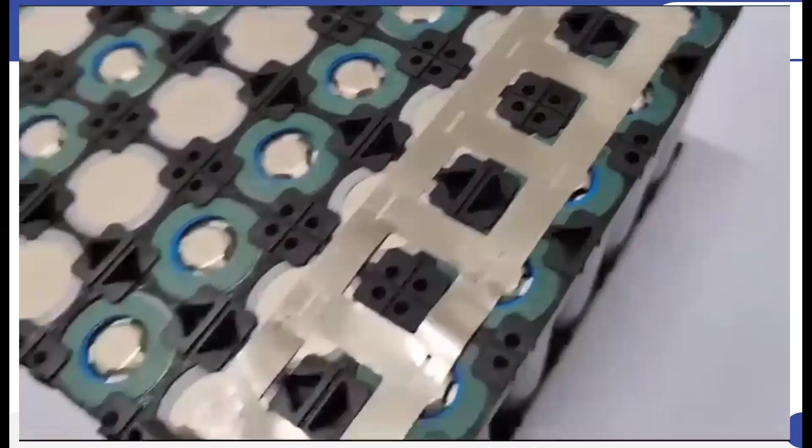Generally nickel is used, so this might be nickel. If there is no proper spot welding, then we have to remove it, so we have to increase the dimension of the spot as well. It should not be very large, otherwise it will hamper the other side of the battery. We have to take care of that at the time of designing the battery pack.

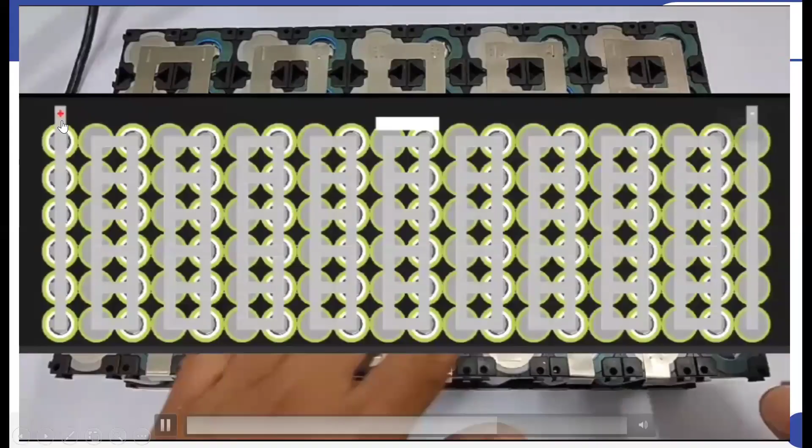So this is how it is connected, this is the positive terminal and this is the negative one. This is the parallel assembly, and the series assembly has been done over there. In a similar way we can connect, and this extra step is for connecting the BMS.

So if in the industry we follow the series and parallel rule, if we want a certain number of batteries connected into series, that will be known as, for example, 4S and 6P, meaning 6 in parallel. So we have 6 strings in parallel. Now, how to calculate these things? How to calculate that, we can do.

So here, suppose that cell was 3.7 volt, having the cell capacity of 2, then we have a battery pack voltage of 48 and 90,000 watt hour we need. Or if we need 60 volt, then we have to write the 60 volt pack voltage overall, and the pack capacity will be 90 kilowatt hour. And then we have to find out the total pack and other values.

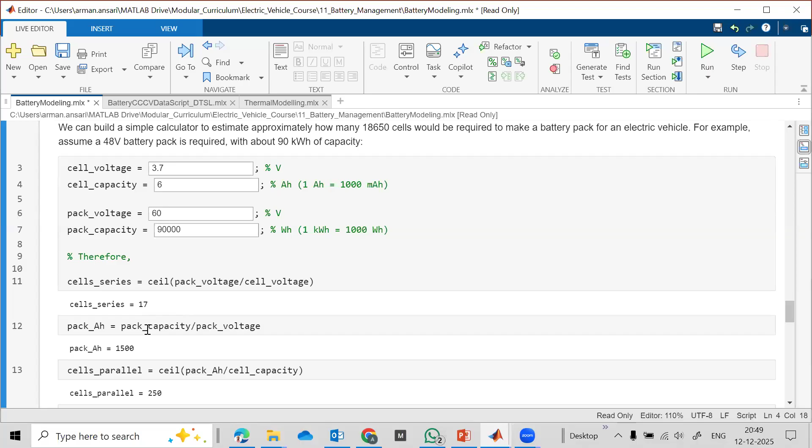So we need cells in series, that will be 17, and cells which will be in parallel, total cells is going to be 750, and total number of cells will be 12750 if we are using this one. If I increase the cell capacity and run it, we still need 17 cells in series, 1500 in parallel, 250 into the parallel. Total battery pack will be 1500 Ah, and then we need 4250. So if we are increasing this ampere hour capacity of the battery, then number of cells will decrease.

Generally, if you see the data sheet of different types of lithium-ion batteries, they will have different AH, so the number of cells will get increased or decreased. If we have very high specific energy density lithium ion like NCA, then we have to use fewer cells. But if we use LTO, which has very low specific energy, the overall cell voltage will be around 2.2 to 2.7. In that condition, we have to use a very large number of cells, so we have to take care of the battery thermal management properly.

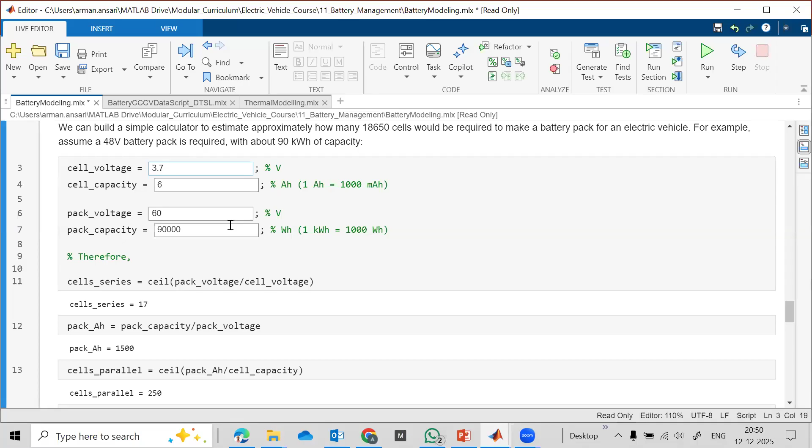So this was all from my side. If you have any question, any doubt, you can ask me.

These topics were very wide, so I tried to explain in a simple manner, but it was a little fast because we had to cover many aspects of battery modeling and thermal management. Without that, we will not be able to understand why we need thermal management at all.

The motor is going to contribute to the heat, and likewise, we have to manage the motor heat as well as the battery heat. Battery is a very sensitive part of the electric vehicle, which requires proper care through the battery management system, through the battery thermal management system, through the refrigeration system, and other heat management. This is because 40 to 50% of the cost goes to the battery.

So that's all from my side. If you have any question, you can ask me.